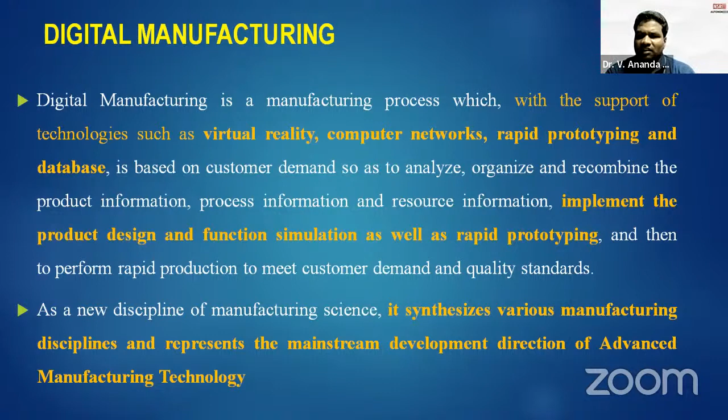In session 1, we discussed what digital manufacturing is, what the elements or building blocks of digital manufacturing are, and how it will help customers for the required components, how to satisfy the customer with the prototype and quality based on the demand of the customers.

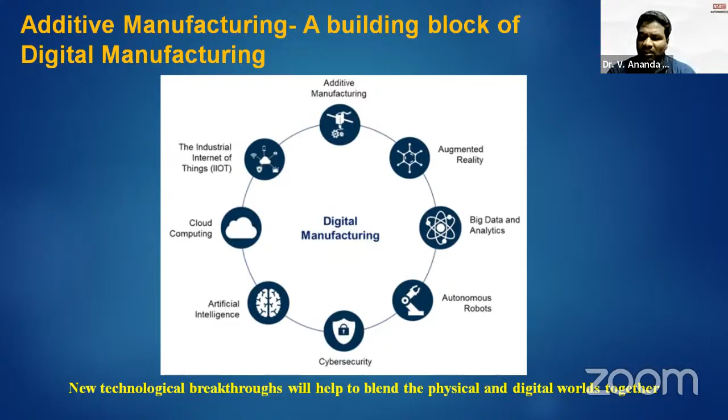We have learned and gone through the various building blocks of digital manufacturing. Among them, additive manufacturing is one of the key parameters through which we can prepare prototypes or tooling before manufacturing the final components. We have also gone through subtractive manufacturing, what it is, and what additive manufacturing is.

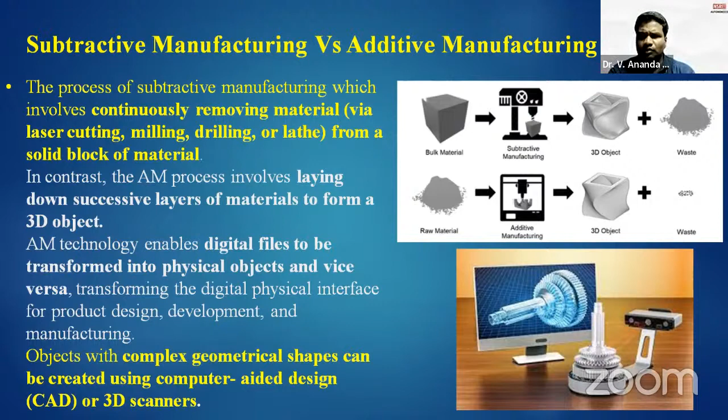And we have gone through the overview of the global AM market. In India, the global market percentage is only 3 to 5%. In this aspect, the usage, involvement, and development of additive manufacturing has to be geared up in India. We also saw the different additive manufacturing drivers from a revenue point of view.

We have seen recent government initiatives, which are more to promote and encourage the additive manufacturing sector in industry, academia, automobile, and so many fields. We hope we will get more initiatives and schemes from the government side.

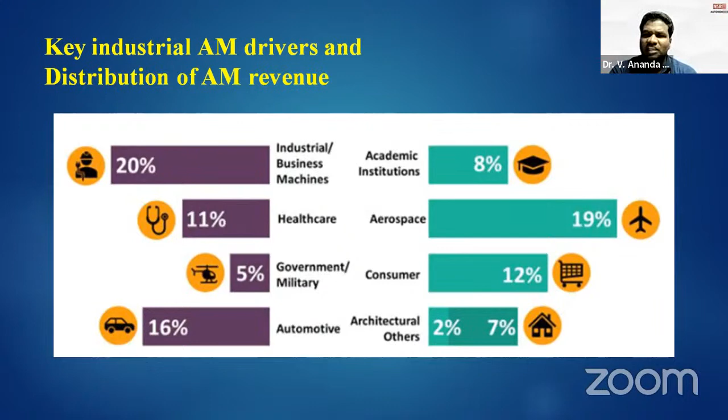We have seen the comparison of the product development cycle of additive manufacturing products and injection molding. By using additive manufacturing and a digital filing system, we are able to complete the product development cycle within days, as compared to weeks or months for injection molding, due to the delay and number of steps required to prepare a component.

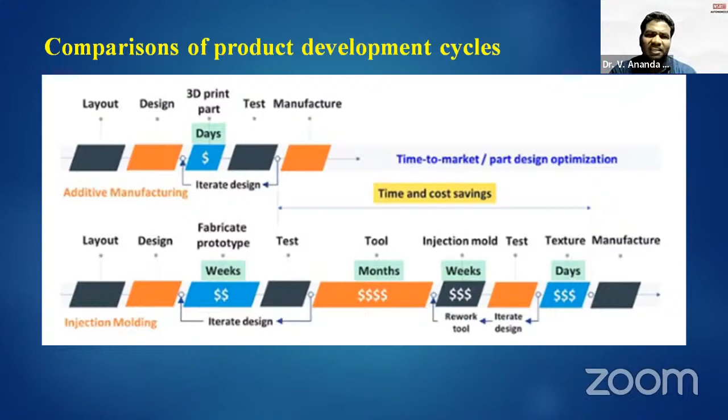As compared to injection molding, additive manufacturing, right from the layout to the manufacture of the final component, completes within days. So that is the type of advantage we have through additive manufacturing.

We have seen the additive manufacturing process cycle, right from design optimization and simulation to post-processing, monitoring, and validation of the component. Material selection, which we discussed based on the product requirement and final functioning of the component, is very important.

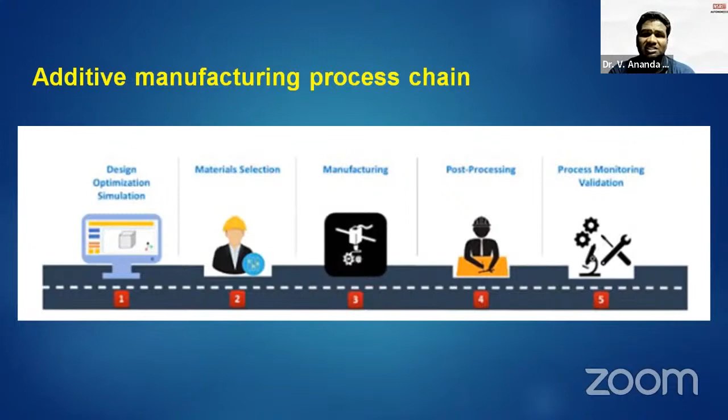Manufacturing of the component, process parameters, and the environment play a very important role in the fabrication or preparation of the components. Post-processing is an essential step in the additive manufacturing process cycle.

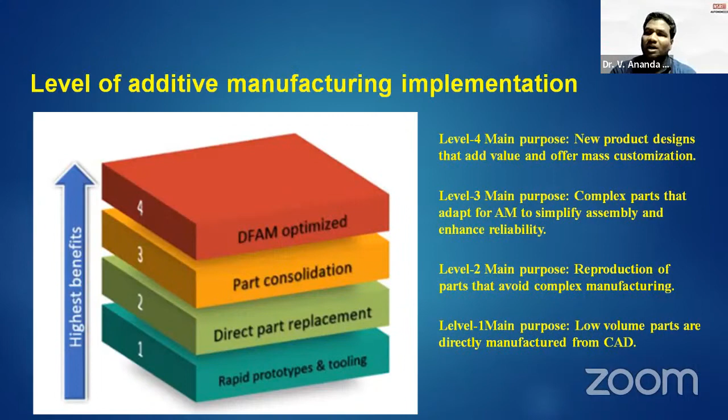We have seen the various levels of additive manufacturing, right from level 1, where directly manufactured low volume parts are made directly from a CAD file, to the new product design added value to offer mass customization. So we have gone through the levels of additive manufacturing.

We have also seen the various types of additive manufacturing processes: VAT photopolymerization, material jetting, powder bed fusion, directed energy deposition, binder jetting, material extrusion, sheet lamination, etc., and what materials or raw material forms are required.

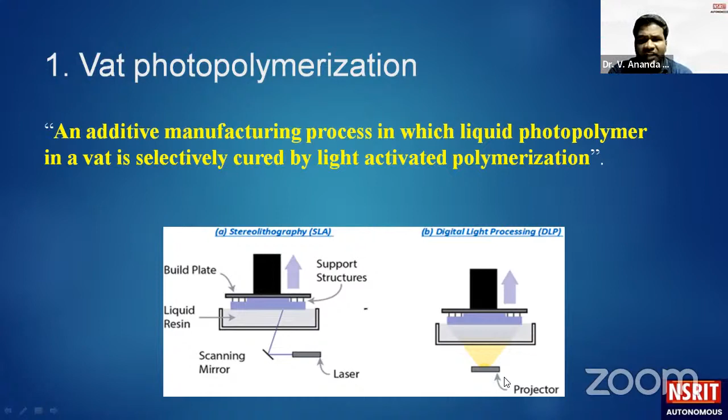So in DLP, now we will see the working principles of VAT photopolymerization. The first step is the conventional scanning type SLA process, stereolithography, which is a basic 3D printing or additive manufacturing process, a rapid prototyping process, in which the UV laser beam is scanned and cures the surface of the photo curable resin.

As mentioned earlier, the resin placed or poured in the vat is photo curable resin, and the UV laser scans layer by layer, curing the surface of the photo curable resin. While in DLP, the projection type, once the light projects onto the vat, the total layer is hardened. This projection type DLP process utilizes an LED light to project a whole cross-sectional area of mask projection onto the resin surface. The main difference between SLA and DLP is the approach, the way of light projection.

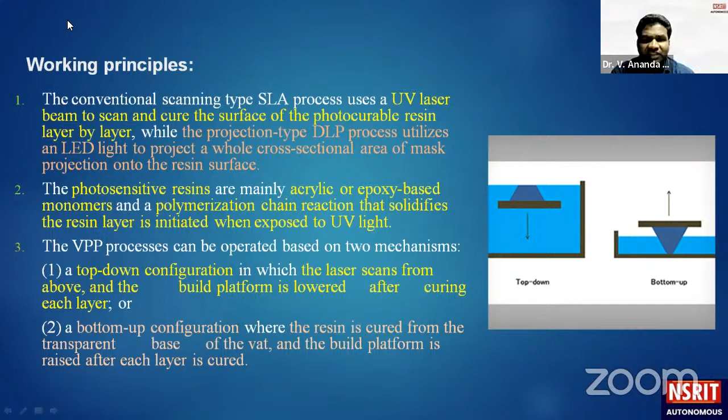So in the earlier case, in top-down configuration, the build plate is lowered after completion of curing each first layer. And in the bottom-up approach, the build platform is moved upward after completion of one layer. So the process continues like that.

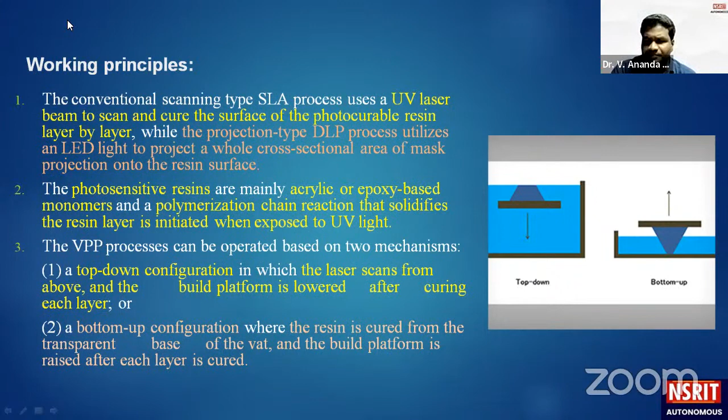And the fourth point: the resin flows in after each adjustment of the build platform, and the process repeats. The light source, whether raster or DLP, repeats the process until all layers have been built, till completion of the product.

And fifth point: upon completion, the printed part is elevated from the vat. Upon completion, after hardening or curing of each layer, the printed part should be elevated from the vat.

As you know, in raster scan type or DLP direct light source, the portion to be printed, hardened, or cured is transformed to solid form, but the surrounding untreated, uncured, or unreacted resin should be washed away from the vat. This process is carried out using isopropyl alcohol.

So after preparation, after scanning, after completion of all the layers, after completion of curing or hardening of all layers, the product prepared through vat photopolymerization should go through post-processing. The post-processing using a UV oven is required.

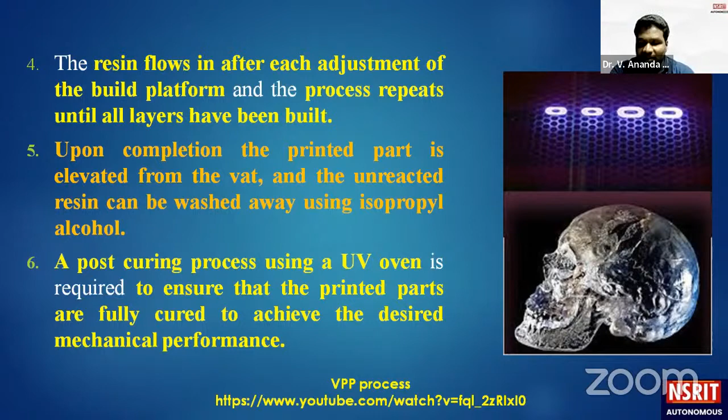So through this post-processing of the product which is cured in vat photopolymerization, in order to achieve the desired mechanical performance, this post-processing is very essential to get the final desired characteristics of the item or the product.

And there are various benefits with this vat photopolymerization additive manufacturing process. The first benefit is, the vat photopolymerization technique provides the highest accuracy, excellent surface finishing, and very fine details can be obtained.

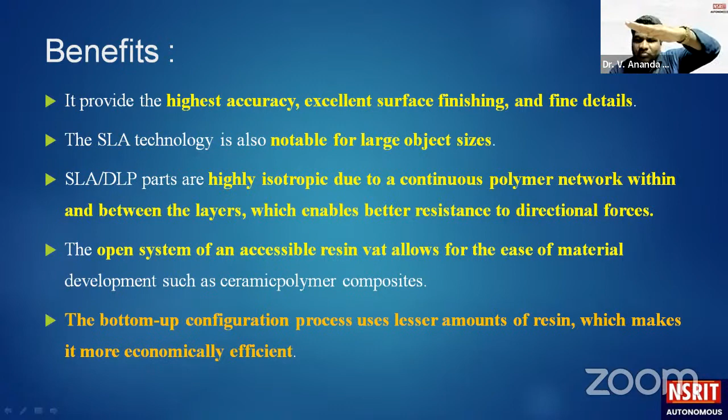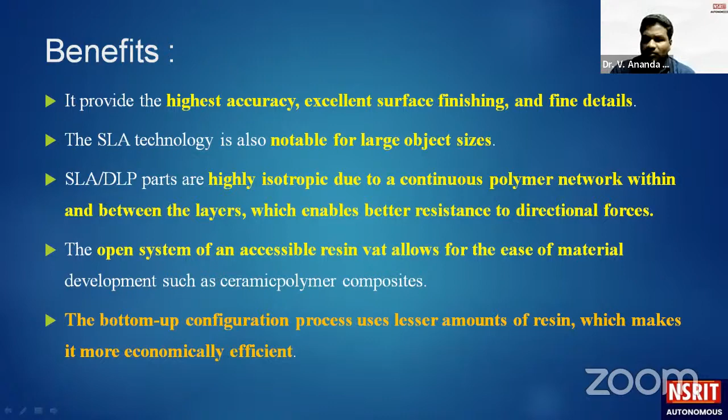Therefore, through this bottom-up approach of configuration, we can get the component with less amounts of resin. That means we may not waste the uncured resin. This is a very important point in vat photopolymerization.

As you know, the additive manufacturing process chain has pre-processing stage, processing stage, and post-processing stage. In pre-processing, we have to design the component and provide various parameters before processing. This involves the provision of support structure, layer height, wall thickness, infill density, and many other parameters. The support structure pattern is also an important parameter.

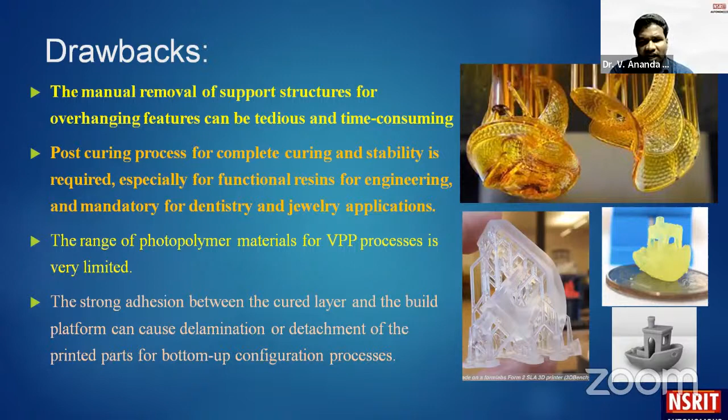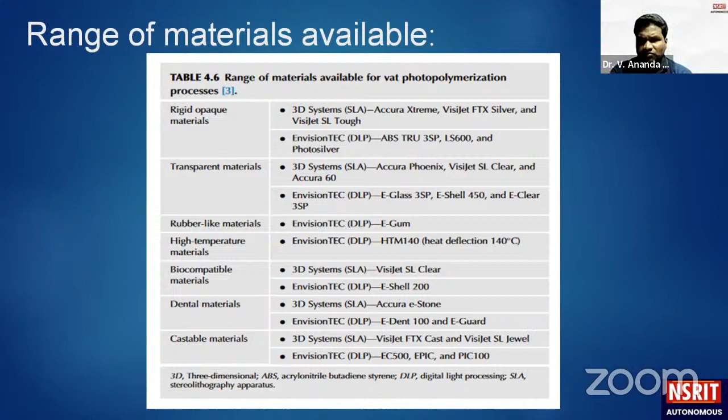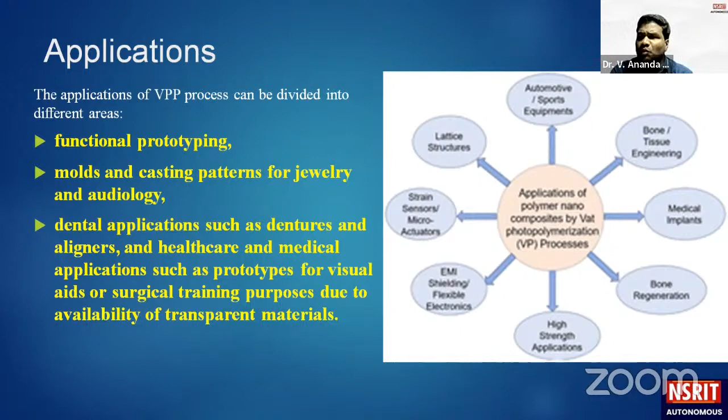The various applications of this additive manufacturing process: VAT photopolymerization is used in automotive fields, sports equipment, and biomedical engineering such as implants and bone regeneration, high strength applications, EMI shielding, flexible electronics, strain sensors, micro actuators, and lattice structures. It is used for functional prototyping, preparation of molds for casting products, jewelry patterns, and audiology. This process is also used in dental applications such as dentures and aligners, and in healthcare and medical applications.

The second process is material extrusion. As we have seen, in VAT photopolymerization the raw form of material is liquid, whereas in material extrusion the raw form of the material is solid.

The material extrusion process is commonly referred to as fused deposition modeling (FDM) or fused filament fabrication (FFF). FDM is the second most widely used rapid prototyping technology after VAT photopolymerization.

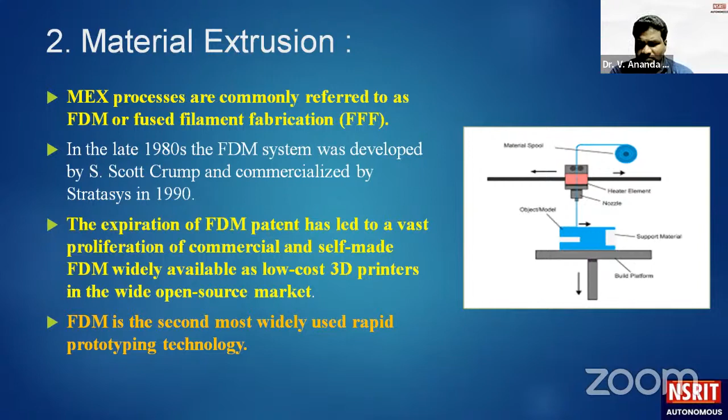The limitation that created a challenge for wide application of FDM was an earlier patent issue. After expiration of the FDM patent, more entrepreneurs and industries from various locations around the globe began preparing FDM machines, and now these machines are available at low cost, even at 15,000, 20,000, or 30,000, ranging from hobbyist to industry purposes.

This is the fused deposition modeling equipment, Prusa.

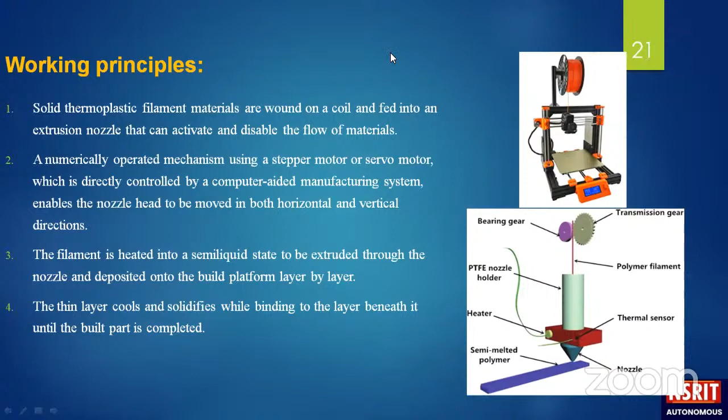This is the schematic representation of the extrusion process. Here the red portion is the polymer filament, and we can see the bearing gears and transmission gears. The filament passes through the nozzle holder and is heated in the hot chamber. This hot chamber or heater is connected with a thermal sensor, through which we can set the temperature of the hot end. The semi-solid, semi-melted polymer comes from the hot end and is laid down on the platform or bed based on commands received from the G-code file, prepared as part of pre-processing.

Now let's see the working principle. The solid thermoplastic filament is wound on a coil, and this filament is fed into an extrusion nozzle through the hot end, which can activate and disable the flow of material. A numerically operated mechanism using a stepper motor or servo motor directs the filament through the hot end, which follows the CAD file and enables the heated nozzle head to move through the bearing gear and transmission gear in the vertical direction.

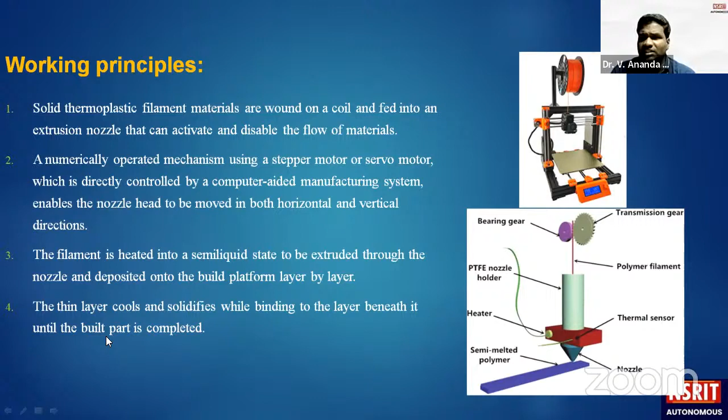And the next step is the program instructions, which comes from the G-code file, prepared through the CAD model using the computer system and softwares like slicers. 3D printing slicing softwares are fed into the machine, and based only on these instructions, the bed moves downwards, or the extrusion mechanism moves upwards in the Z direction.

An important point of the process parameters, or the environment, to be noted here are the layer thickness of the filament laid on the build platform, the width of the filament, the orientation of the filaments, and the air gap between the filament to filament.

They are present in the same layer, this air gap between filament to filament. If one scan, one part is laid down on the platform, and the second line is laid down like this, the air gap between these two rasters plays a major role. So we have to avoid this air gap between the rasters.

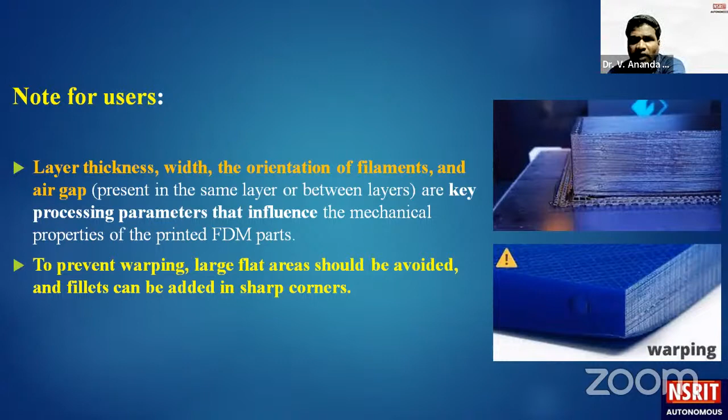We are also able to see the warping at the edges. The main point to observe here is that warpings are observed at the corners or edges of the object. So to prevent warping, large flat areas should be avoided, and fillets can be added at sharp corners. Instead of sharp corners, if you provide fillets, we can get satisfied prints and avoid the warping defects.

And FDM parts have more flexibility in terms of benefits. FDM can be done at a low price, and the machine costs around 30,000 or 15,000. We are able to purchase at the lowest price from 15,000 to any price we can get. This is one of the most beneficial parameters for hobbyists and those interested to learn from the basics.

And there's high speed as compared to VAT photopolymerization - FDM parts can be prepared at a high speed, and there is simplicity of the process. Just after pre-processing, we can load the G-code program into the machine, insert the filament to the nozzle, and the machine can run as per the program very efficiently without much human interaction. That is the simplicity we observe in fused deposition modeling, and because of this simplicity in operation, FDM gets more focus in the present scenario.

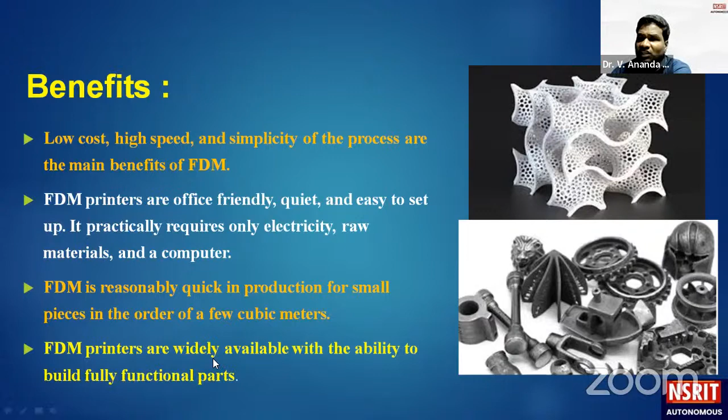So FDM printers are widely available with the ability to build fully functional parts, which can be prepared based on requirement to remove or avoid time lapse in production. And there are some drawbacks in every process, as with VAT photopolymerization. Here also, in this additive manufacturing process, we have some limitations - the accuracy and fine details of the FDM parts are less.

But in VAT photopolymerization, we can get more fine details, and we can expect more superior accuracy because of the mechanism involved.

But here, the FDM gives low accuracy, and we may not get fine details as in VPP, VAT photopolymerization. Due to the discretized layer by layer printing process, FDM parts have stair-stepping surfaces which lead to a rough surface finish. In VPP, the structure has a continuous structure, but here the surface finishing is not up to the mark.

And the mechanical properties of FDM parts are less due to the anisotropic nature in the vertical direction. One layer laid over the other, like that all layers are printed in this manner in the Z direction. If you observe here, the main drawback in FDM parts is the weakness in mechanical properties in the vertical direction.

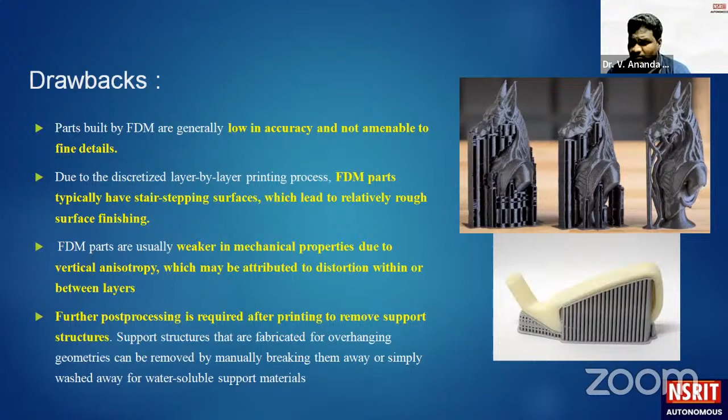So this is a very important parameter, and further post-processing is very much required after printing to remove the support structures. If you see here, the product is this one, but the support structures occupy more space. And if you want to remove these support structures, it takes more time and more focus of the operator, and sometimes during the removal of the support structure, the main part also gets damaged.

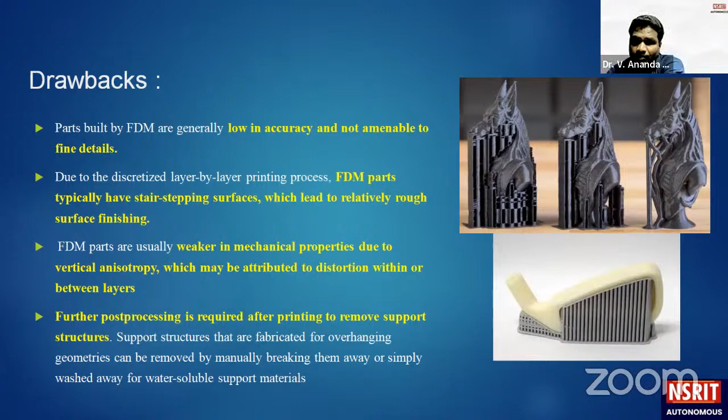So the support structures fabricated for overhanging geometries can be removed manually by breaking them away, or simply washed away for water-soluble support materials. New techniques have come into the picture like water-soluble support structures, but in some cases, the removal of the support structure is a tedious task and an important consideration.

So a very famous material in the FDM process or the material extrusion process is polylactic acid. Polylactic acid material is used at a high level, and for more production, the PLA material is used.

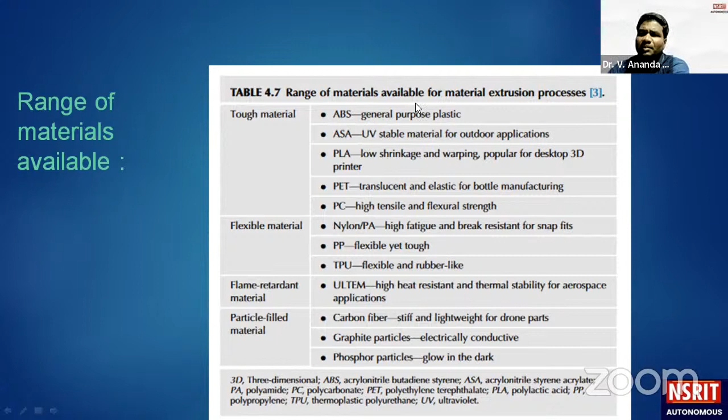And fused deposition modeling parts are used in various applications, like biomedical applications, automobile applications, aerospace and aircraft industries, household applications, sports and equipment, music equipment, and a number of other applications. The main applications of FDM printed parts are rapid prototyping and concept modeling.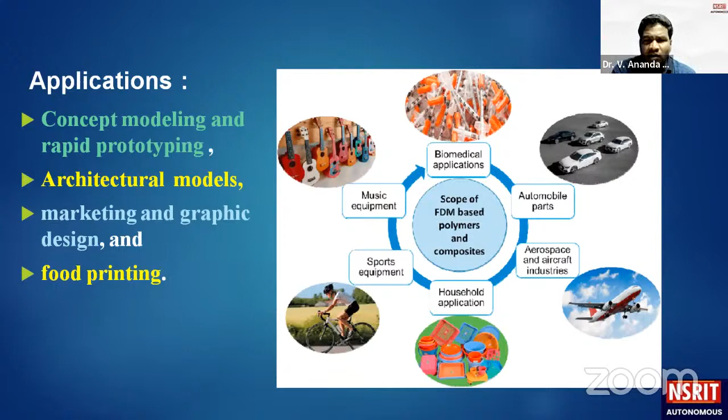Architectural models can be prepared, and marketing and graphic designs can be done, and food printing is also a new technology coming into the market. We can print food items based on the geometry of the file. We can create different structures, and food printing is the new technology coming to the environment using fused deposition modeling.

And I'm happy to show these images, the gallery of 3D printed items in the 3D printing lab at NSRIT. We are seeing here various items, right from mechanical structures, architectures, and customized objects, and items which can be used in medical fields.

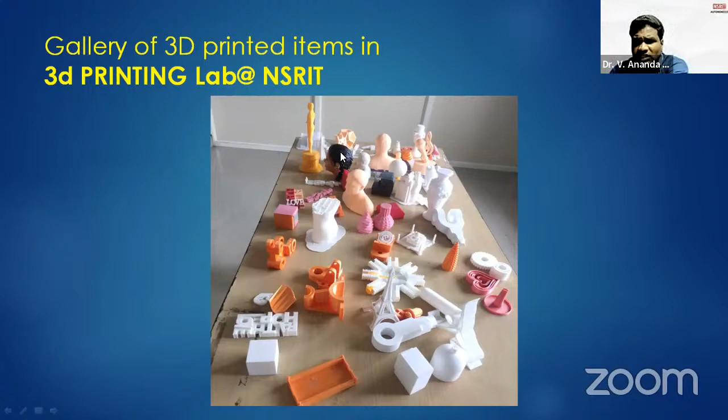And in schools, to demonstrate the human body or organic structures, and different types of components, organic models and inorganic models. Different structures can be prepared, fabricated, designed, or developed using the fused deposition modeling technique, which is available in the 3D printing laboratory in NSRIT.

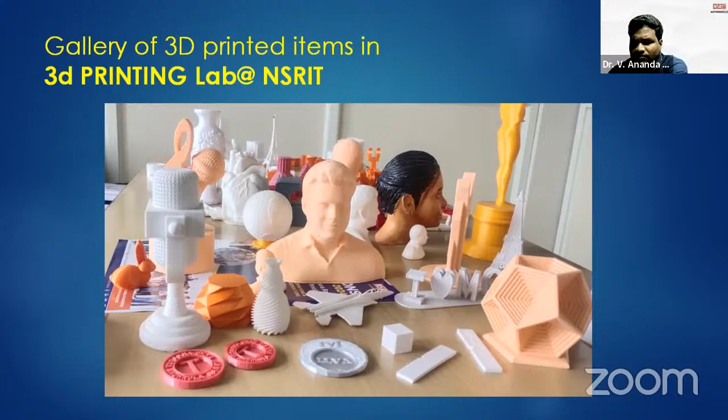These are all the models prepared in our laboratory only. These are the various important types of models we have prepared in the 3D printing laboratory in the mechanical engineering department.

NSRIT. We are developing 3D dual names, three-dimensional dual names in one block only. We are having two names, one side it appears as one name, and on the second side it appears as the second name.

And our students are doing project works, more interesting project works, like 3D statues or miniatures or face bust models from 2D photos, and phone stands, customized products, and 3D mementos. We are designing and developing 3D mementos and awards, and 3D tools.

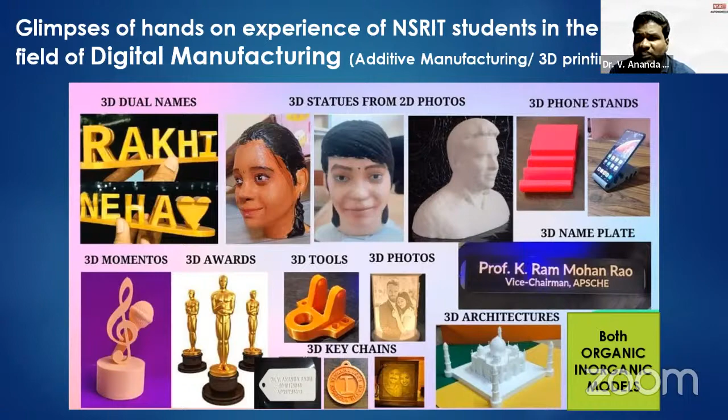Whatever components we are developing, we are preparing as part of modeling curriculum. We are preparing 3D printed models from known 3D models, CAD models. And we are preparing 3D photos, 3D architectures, 3D keychains, name plates, and so many types and varieties of materials and products, developing in the 3D printing laboratory, which is situated in the mechanical engineering department, NSRIT.

And these are all the facilities available in NSRIT, the 3D printing laboratory, CNC milling machine, and robots, the applied robotics laboratory. These are the important hands-on experience sessions conducted regularly to enhance the technical skills of students in NSRIT, in the mechanical engineering department and other departments.

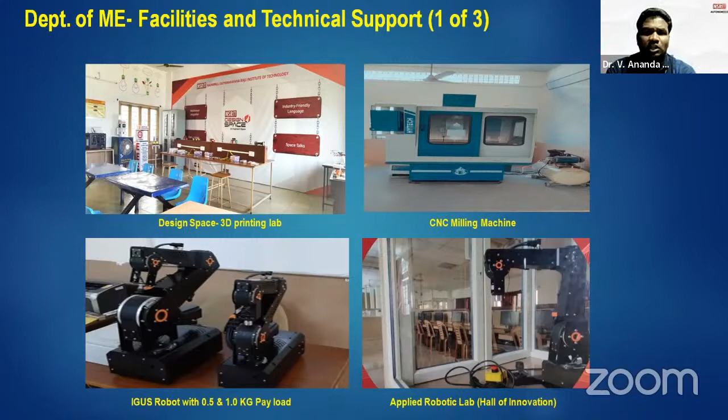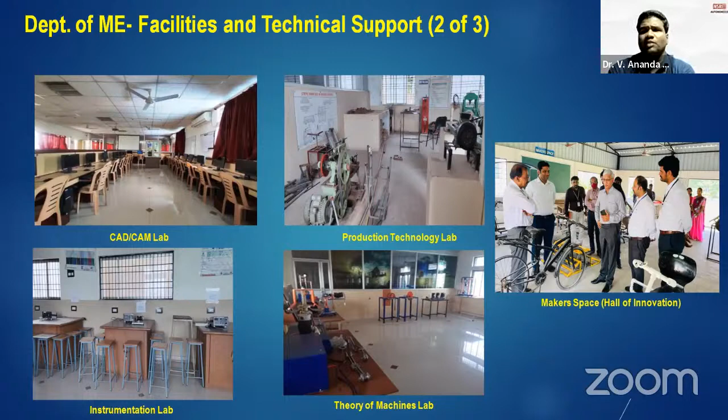Various laboratory facilities are available here at a large scale, and various experts are also visiting our facilities and giving valuable suggestions to improve these facilities, to exhibit more, and to get more attention of students, researchers, industry and academia. Various interdisciplinary projects are done by the students.

About our department - it was established in 2009 in NSRIT, Nadimpalli Satyanarayana Raju Institute of Technology, which is affiliated to Jawaharlal Nehru Technological University, Gurajada, Vizianagaram. We offer UG and PG programs: UG BTech Mechanical with 90 intake, and PG MTech Thermal Engineering with 12 intake.

We have sufficient faculty members and a number of doctorates - 5 in total. I myself am one of the doctorates, Dr. Ananda Babu. NSRIT also offers BTech programs in Civil Engineering, Computer Science Engineering, Artificial Intelligence and Machine Learning, CSE Data Science, ECE, EEE, and Mechanical Engineering, along with honors and minors with transdisciplinary applications and more industry-institute linkage.

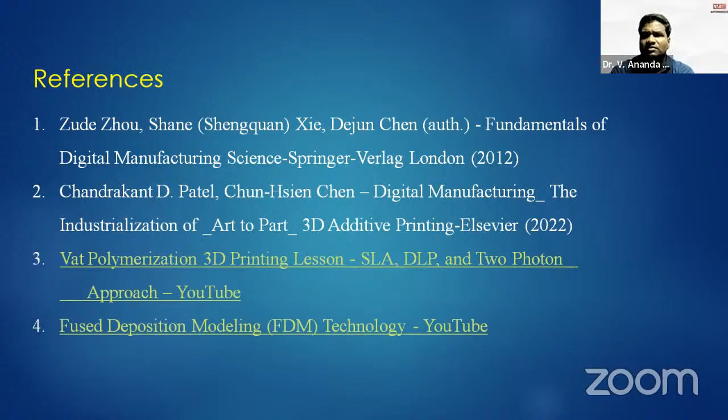This session will continue tomorrow. We will go through the remaining additive manufacturing process and continue tomorrow. These are the references I took from textbooks, websites, and YouTube for your reference. Thank you.